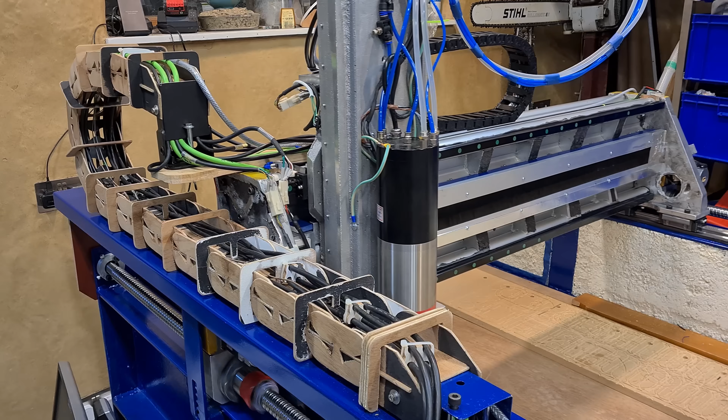This is a big CNC machine. In truth, when we cobbled it together, I didn't know what we were going to be using it for. It defies the first law of CNC building, which is to decide what you'll be cutting and then calculate and design your machine around that.

When you're into upcycling and using reclaimed materials, a versatile tool is a powerful tool. This video is about exploring that power.

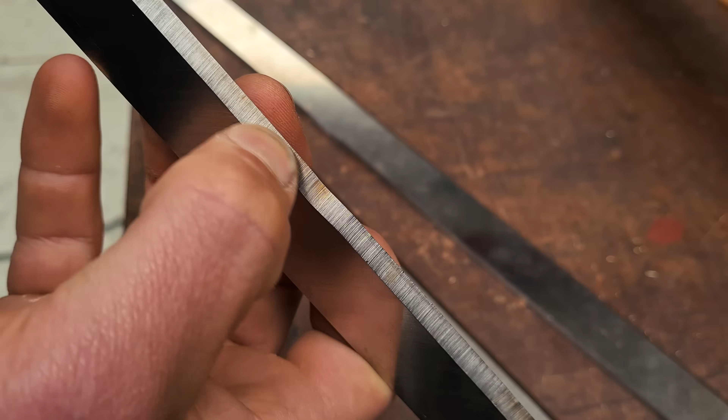A while ago I sent these big planer knives from the thicknesser away to be sharpened, and they came back looking a lot rougher. Admittedly they are sharp, but they're just so much rougher than they were before.

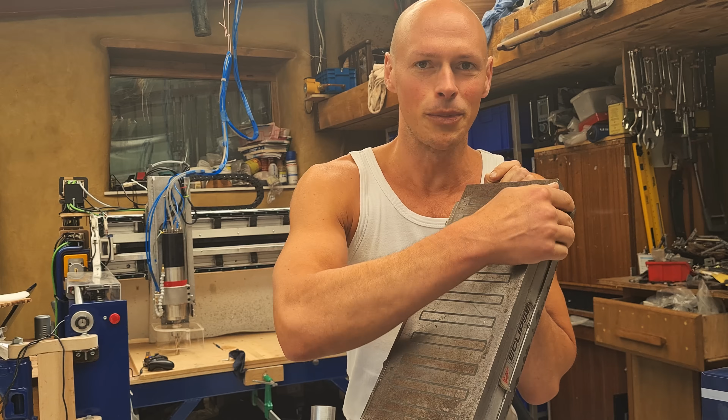So anyway, high-speed steel, this grinding disc, the CNC machine. Oh, and one other thing, I was given this magnetic chuck. It doesn't work at the moment, it doesn't switch on or off, but it'd be quite cool to be able to use that somehow in the whole process. Let's see what we come up with, yeah?

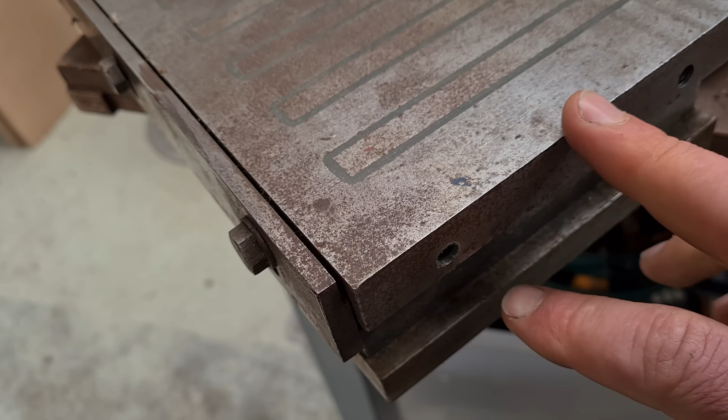Judging by the other side, there was some kind of tapped hole there at some point, but it's just full of congealed something. I don't know what that stuff is.

Now we've got some cleaned up threads on the edge of the mag vise, let's make some brackets to hold the whole thing at a nice angle for planer blade sharpening.

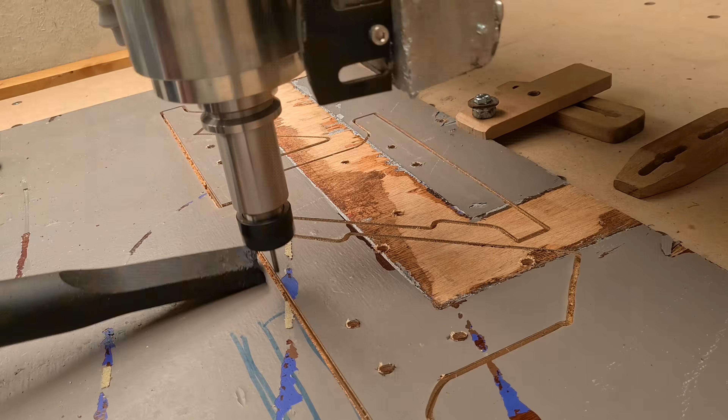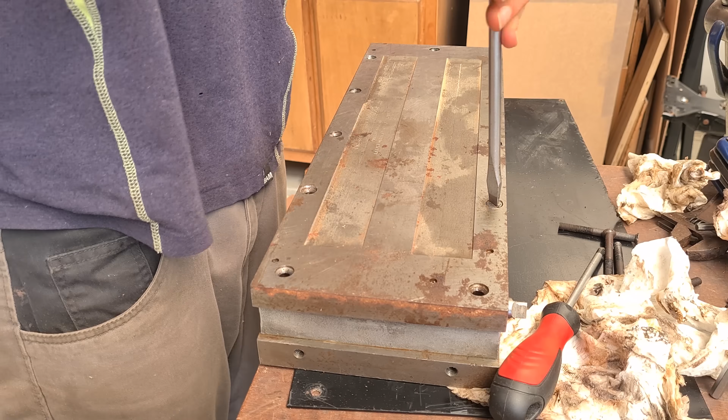Here's what we've got from that scrap. The makers of this thing sure didn't want people going inside, as well as the obligatory 'the world will collapse in if you open it up' warnings. There was also epoxy covering some of the screw heads, and one screw that was just very well seized in.

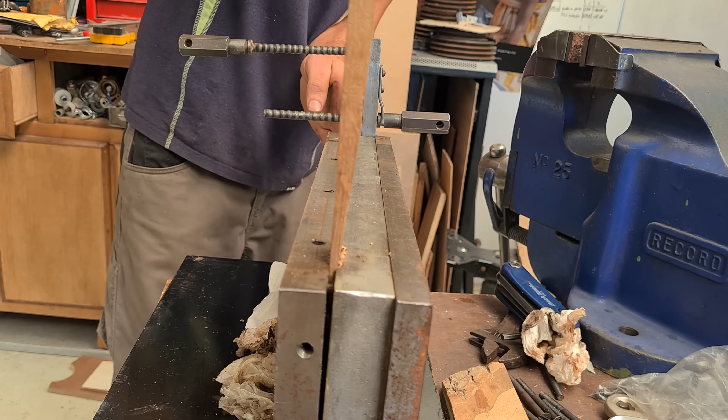Once the screws are out, there's the magnetic force holding it together, but also some very tightly fitting metal dowel pins.

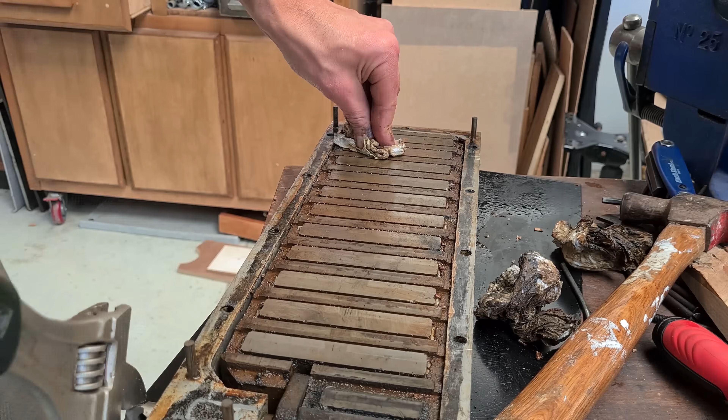For some reason I was expecting more magical pixies inside that make this work. Simply a block of magnets spaced out with not very magnetic material, and that whole block is shifted side to side to line up or not with magnetic material in the top and bottom plate. It's really super simple if you pretend we understand why magnetism works.

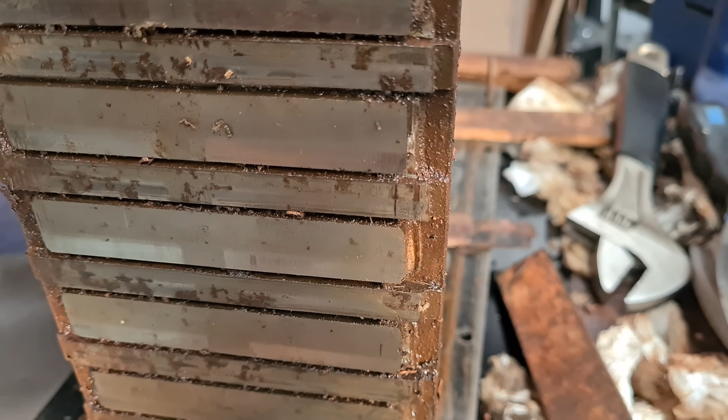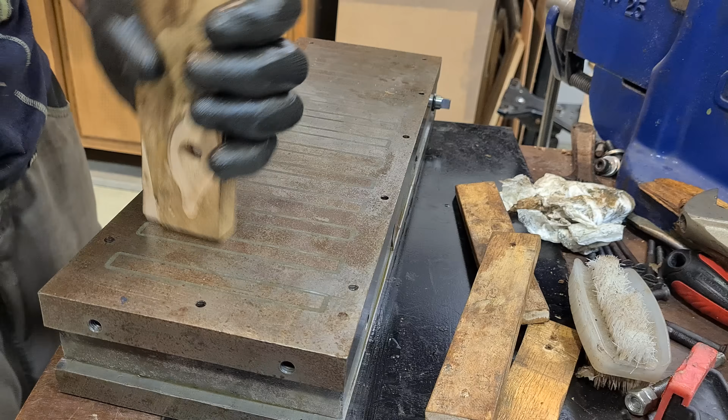The reason this chuck wasn't doing anything was simply that this middle block was seized in place. It's designed to kind of sit in a bath of oil, rather than sitting on a stiff paste of rusty sludge. After cleaning and flattening down all the mating surfaces, verifying it actually works, we can put it back together

with some liquid gasket type material that you get for car sumps. And there's a little oil plug where you can fill the whole thing. Now all we need to do is flatten the surface.

I know what you're thinking. Flowering elbow, why aren't you using a surfacing bit to make that flat spot on the MDF? I'm glad you asked. Let me tell you a story about slate.

This little would-be house sign is a tester, and it gave us confidence that the machine could actually cut slate. Problem is, if the surface is this uneven, turns out engravings look really sucky, leaving you to do all kinds of barbaric chiseling and remedial God knows what.

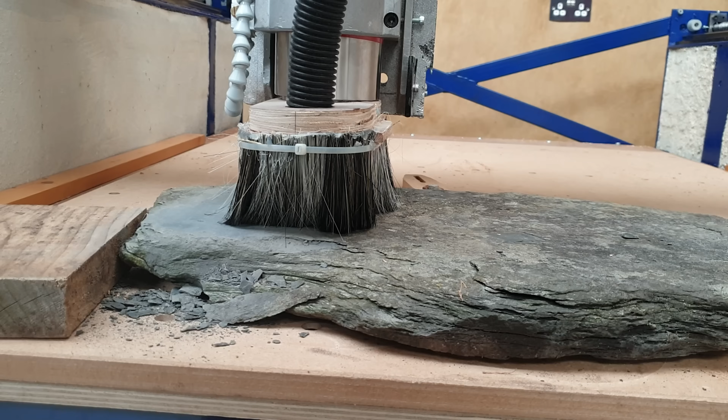For the next test, the obvious thing to try was flattening the slate on the machine the way you would a wooden slab or the spoil board, and in fact that's the same bit I'm using here. It's nothing special, a carbide surfacing bit, and in fact it was a bit blunt before we started.

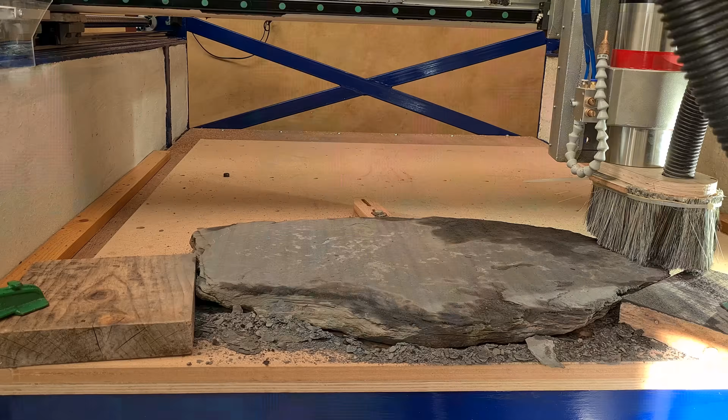Got quite the pushing. Went past the carbide bits and into the backing behind. If you don't mind the unintentional carbide regrind and the slight undulations, that actually worked quite well, considering at least they were proof of concept for something way more intimidating.

Back when we were in fully fledged lockdown here, around about the time when our humble leaders were taking a well-deserved party as it turns out, like too many other people, Sam's dad passed away in hospital, where we were forbidden to visit.

So yeah, if you have any idea of the price of a memorial stone, you'll probably guess what we're up to here.

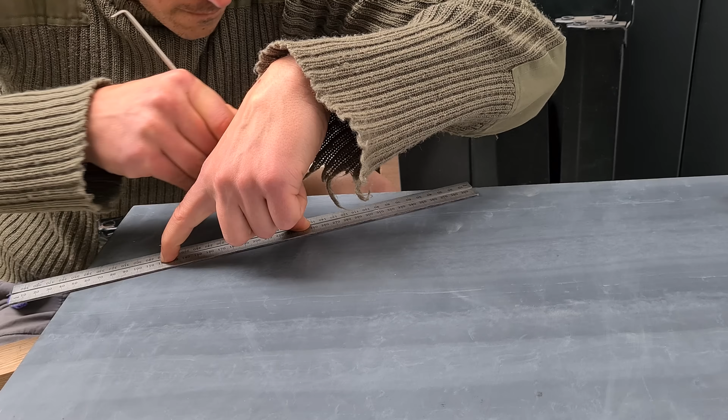Oh, good lord. After explaining what we were up to and selecting this enormously heavy chunk of slate at the slate yard, the guys there kindly offered to surface it with their massive diamond grinder wheel thing.

And honestly, I wasn't going to be doing any more flattening on the CNC machine. Not of stone, anyway. The stone is a shade over 3 inches, meaning I had to get creative to get the whole way through. Luckily, with a lot of patience, it's soft enough that it's possible.

After agonising over fonts for a good while, knowing full well they'd look a bit different engraved on a surface, we tested some out on the offcuts.

We liked them well enough that halfway through we decided to repurpose them as bookends for a slightly morbid, bizarre wedding present for Sam's sister.

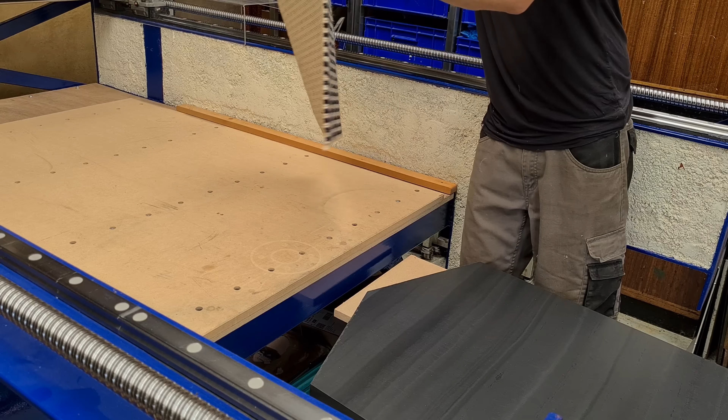It's going to be the heaviest thing that's going to have gone on here. Almost just the right height. I'm a bit nervous about bodging this up while Sam's away.

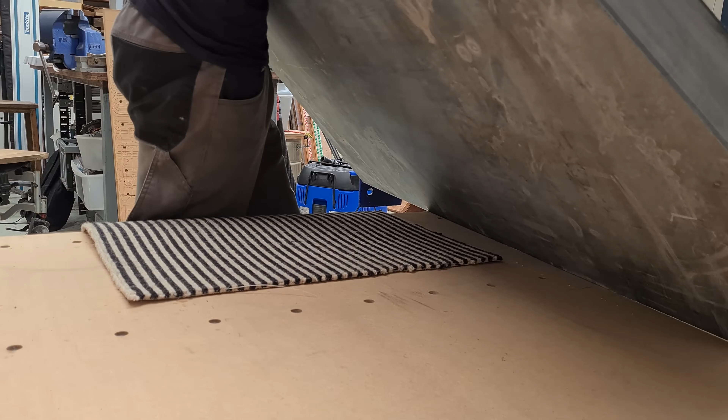Okay. It's a bit shoddy on the back side compared to the front now, so we'll have to give it a good sand down. Put it back gently.

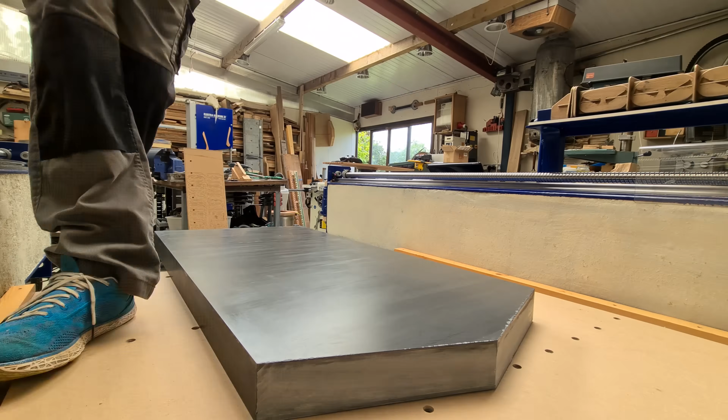It's not laying exactly flat, so we'll have to now make sure it's parallel with the actual spindle. Well, that is way more all over the place than I'd hoped. We'll just have to zero in each either letter or word.

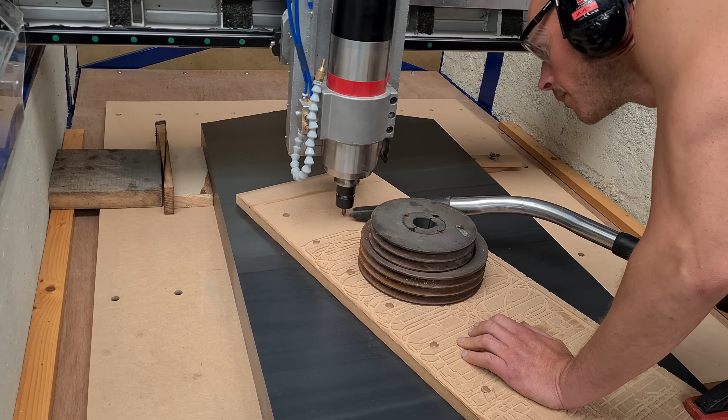So now I'm having a moment of, oh shit, is this really going to work? I might just try it on some wood, just a layer above first, to see what happens.

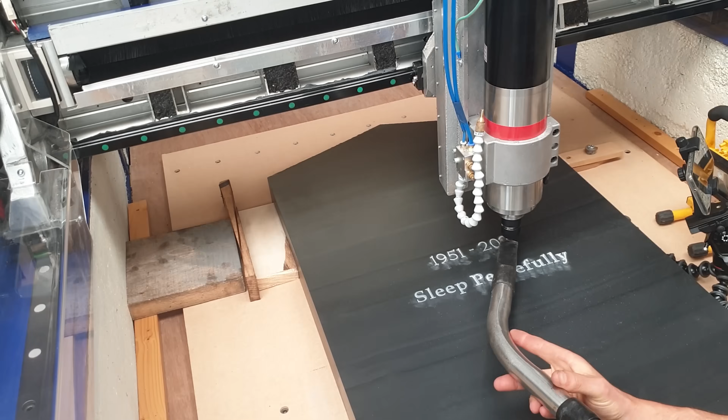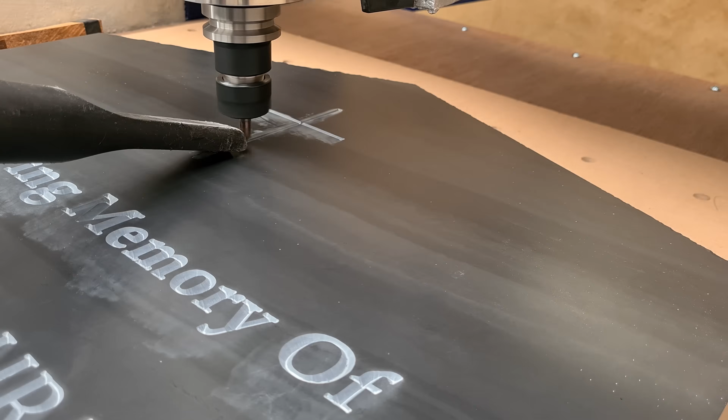Okay, well, as this is supposed to be about the CNC machine, not my headstone related anxiety, here's something to note. The way it clamps in here, it's just some opposing wedges used against the concrete side rails. I've used this method a few times now on quite big things, and it works well. It's interesting because despite the obvious mechanical advantage of having raised up side rails versus tall moving gantry side plates,

is that they get in the way and make it harder to access workpieces and that kind of thing. There's a good deal of truth in that, but the raised rails, as well as keeping the chips further away, can actually be handy for clamping things up.

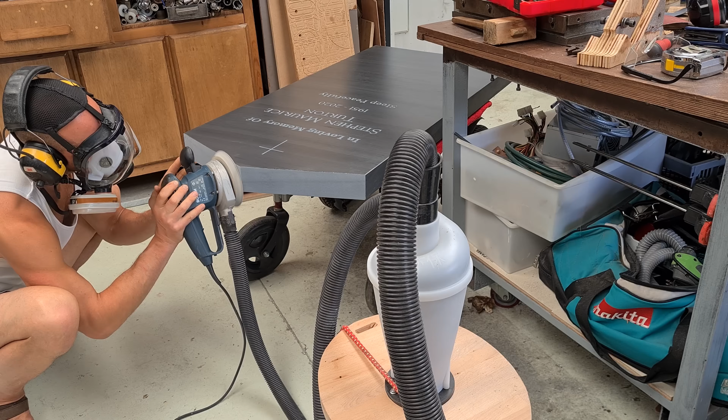Having next to no experience of working slate, I was well pleased with how it sands. It comes up really nice. There was some chip out from where we cut these triangles off, and after looking at it, Sam and me both kind of liked it, so we ended up making that a sort of feature of the top bevel.

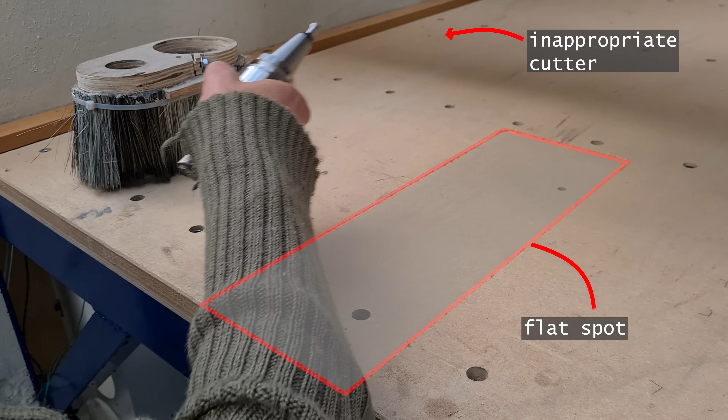So yeah, hopefully that explains why we were using that inappropriate cutter to make this flat spot for the mag chuck. Now, before we attempt to grind it in, because I don't want to annihilate the CNC machine with horrible grinding dust, we need to go on one of those highly rewarding but slightly inconvenient side quests to make some kind of dust shield that's big enough to fit the grinding wheel in.

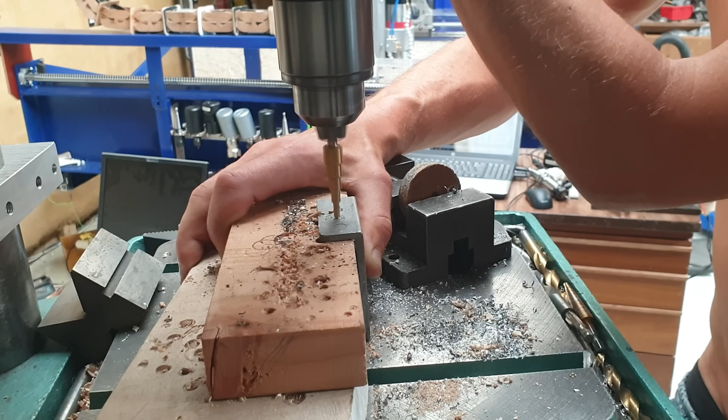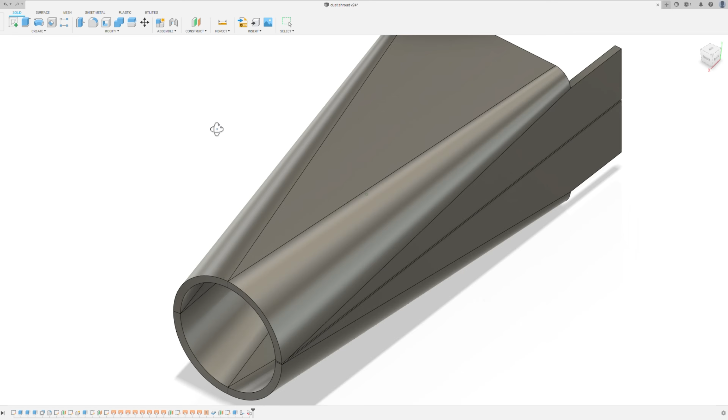We might be on a complete bungling fool's errand, but we're going to take this rectangular section and try and taper it down to a circular section. I've wasted an obscene amount of time already on Fusion 360 learning how to model that.

Without getting into the weeds too much, this is the part with the piece we've already made. If we look at just the transition, it's designed to be a sheet metal part as far as Fusion 360 is concerned. It has a seam, so it makes sense as a sheet metal part. And if we unfold it and look at the flat pattern, there's a problem here that you can see when you go to the side, in that I just couldn't get it to fold flat.

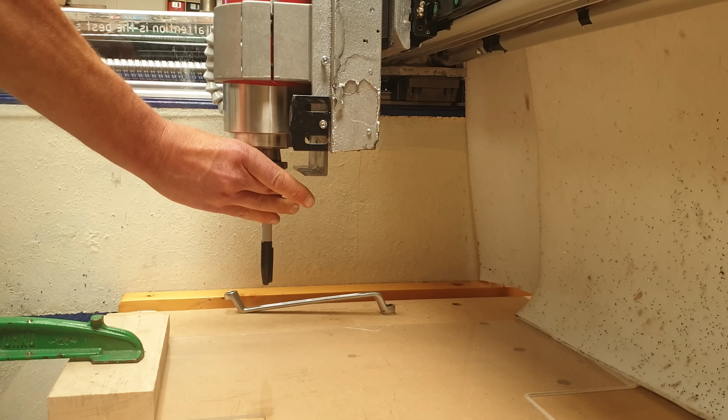I don't know why, and I never got to the bottom of it. Sometimes you just got to live with these mysteries. I think it'd be really cool to see through it, so we're going to try and cut it out of the same material. Considering how difficult it was to bend this to shape, we'll see how it goes.

These will be the folding guides. I think I'll need to have even a remote hope of making this work.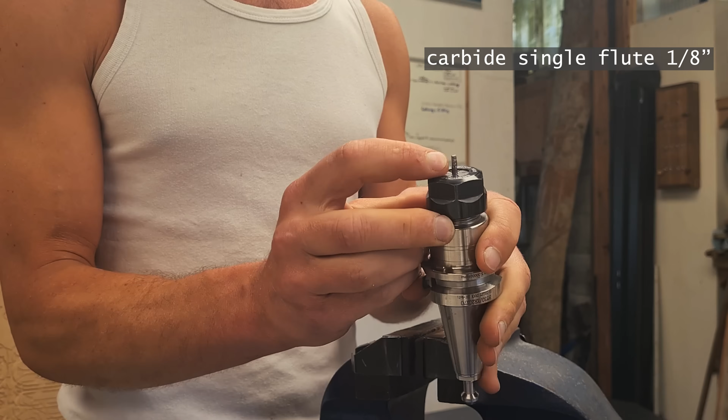These single flute bits are turning out to be quite fragile. They were very cheap for a pack of 10, but this one broke and I've no idea how. It was not even in the machine.

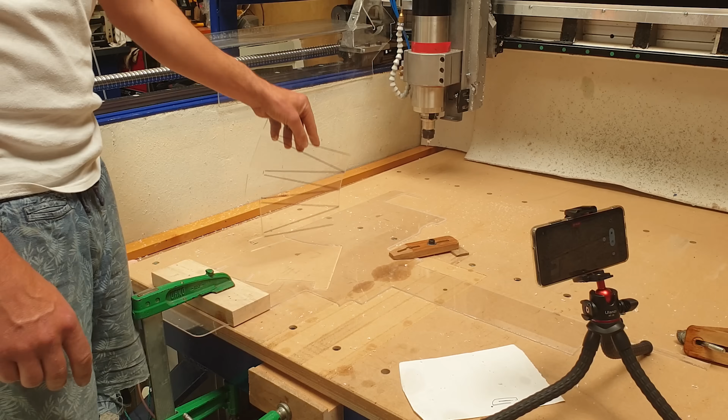Okay, there is our transition piece. Oh. Schoolboy error.

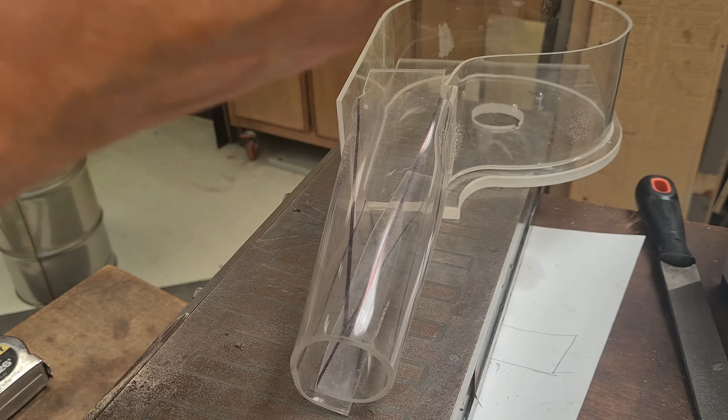Well, it's not exactly how I envisaged it, but I think this is as good as it's going to get, so I'll put some super glue on, see if we can't hold it in this position here. We're using thick viscosity.

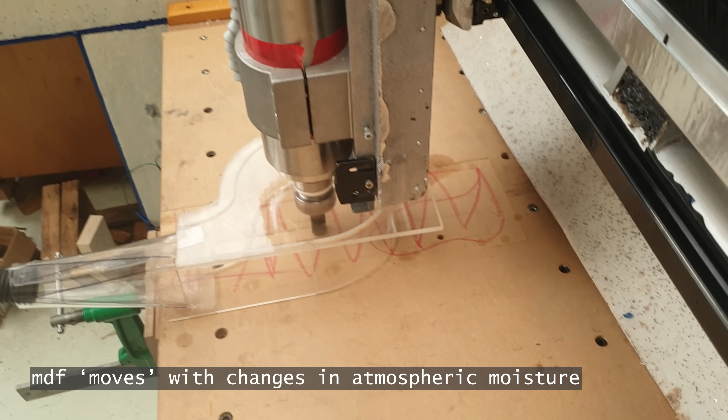Let's try out the dust shoe. By the time it was ready and some other hijacking jobs were done, it was time to re-level this patch of MDF spoil board before we could grind in the mag chuck anyway. Still, it gives me a chance to see the swirly suck-uppy magic in action, and it looks quite promising in terms of the dust extraction.

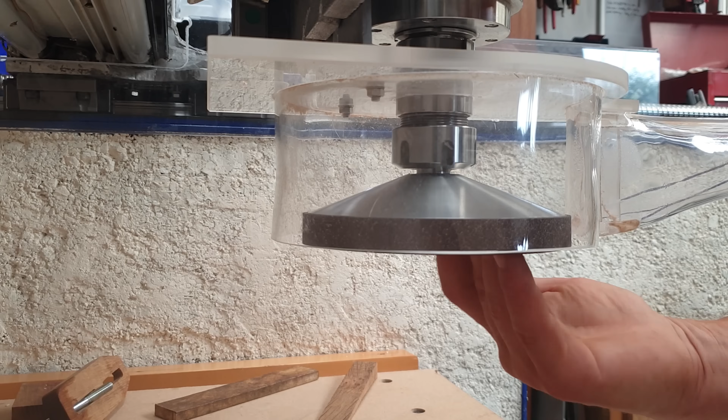So just adjusting the height, put that in, looks okay.

Now the mag chuck's in place, but unfortunately the dowel pins are sticking up proud of the surface now, so before we can put anything on it, although it's still very flat, we just need to clean up the surface, or grind it in as they say.

This really should be quite a test for the spindle. Not only are we going at only 3,500 RPM, which is crazy slow for a 24,000 RPM spindle, it's got to maintain that for roughly about 45 minutes according to the machining time. Let's see how warm it gets or whether it can manage at all.

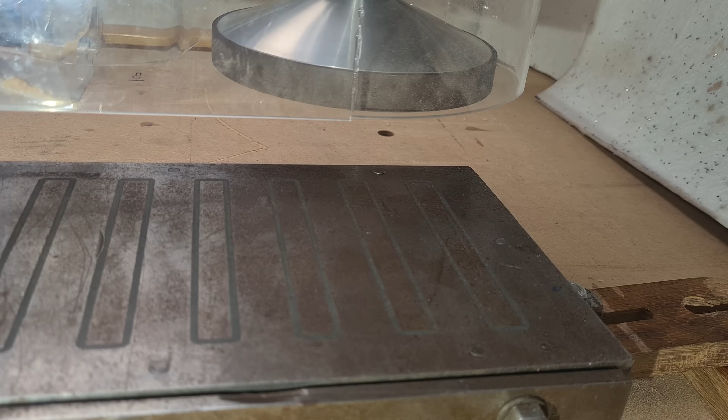Okay, you can see that there, that's what we're aiming for.

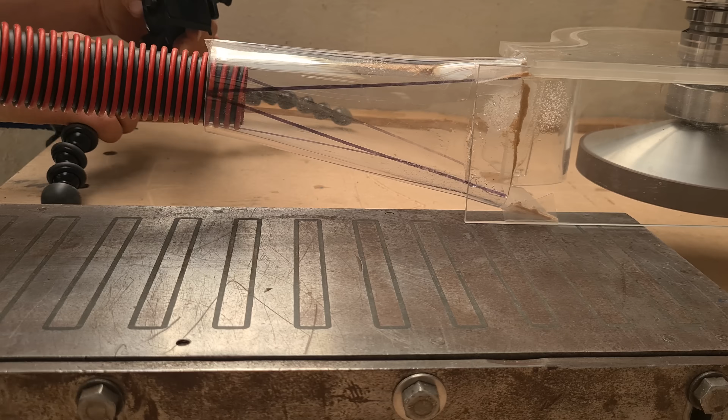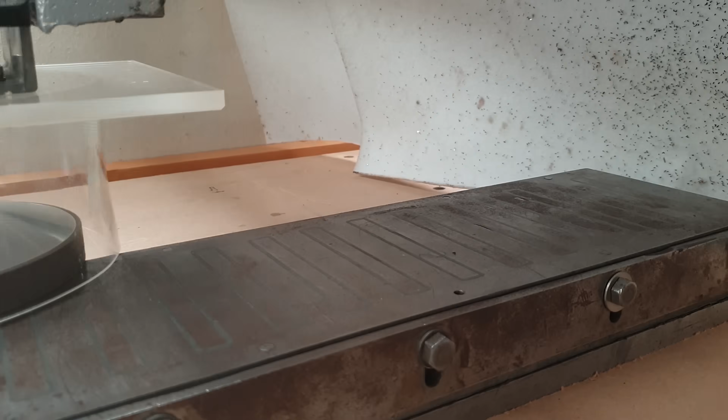Okay, I think we're off to the races. What becomes immediately evident is the slight tram of the spindle, which sends the sparks in a particular direction. The dust shoe is connected to the shop vac via a cyclone, and it is pretty cool to be able to see into the dust shoe to see that sucking up in action.

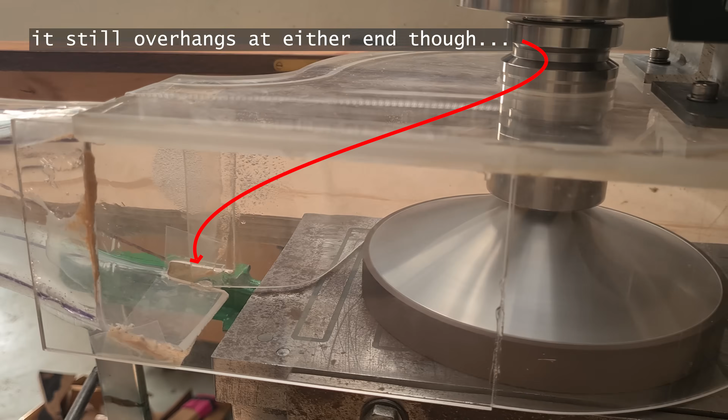Unfortunately, because the dust shoe is hanging off the side of the mag vise, the vacuum forces on the grinding dust are just way reduced. In an attempt to capture more of that, you can see I've rigged up a bit of MDF here just at the same level. Now for the little protruding dowel pins, I thought this was actually working not too bad. Then we started getting to the main body of the material.

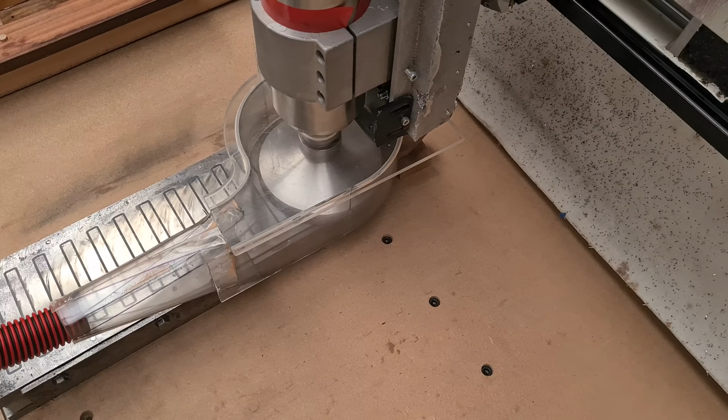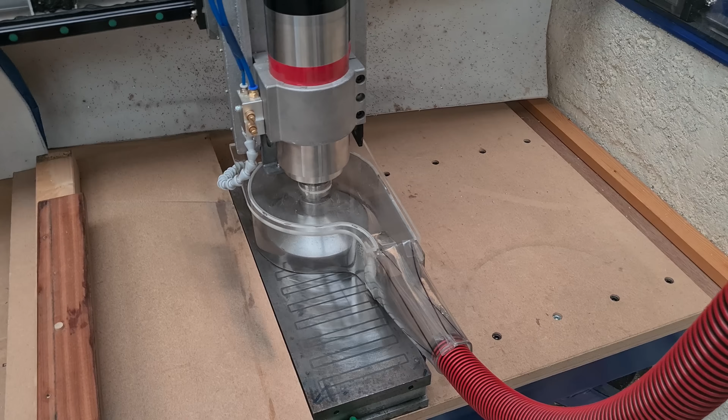Things went downhill from there. I tried various different things, using little bits of coolant on the thing, different feeds and speeds, including slightly naughty ones that were overrevving the grinding wheel. The more things I tried and the more I continued, the more hesitant I got, the more sparks I saw flying out uncaptured, the more grew that sinking feeling that I was making a terrible mistake. The poor spindle grinding to a halt and moaning in complaint each time it hit a high spot. It was not a reassuring experience.

So how did all that go? It went absolutely awfully, that's how it went. Surface grinding on that edge of a grinding disc just doesn't make sense. Too much of it is contacting the workpiece, and I really struggled with it heating up. More on that later. Because of the very slight tram on the spindle, the sparks were going in a different direction, so sparks and abrasive dust went flying all over the place, just like a Catherine's wheel.

Too much of this is in contact with the chuck at once, versus if it was spinning that way, it heated up, lifted higher, and so then tried to grind more heavy. The spindle is completely not designed for this. It stayed nice and cool, and I was piddling around with this for a good few hours. So I'm actually quite impressed with the spindle, and also my own foolhardiness at trying to get it to do something so silly.

This thing should be used with flood coolant. It can go dry, but I was warned it would be much better with flood coolant. That would have improved this whole thing no end, and it might have even worked. Flood coolant on an MDF spoil board doesn't go very well. I think we might have got through all the reasons why this was a complete fool's errand.

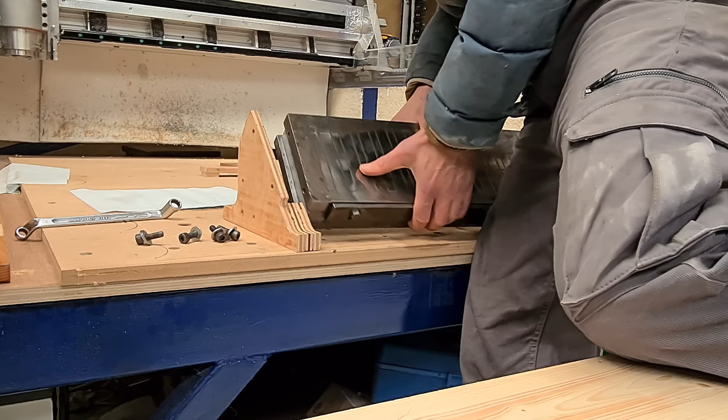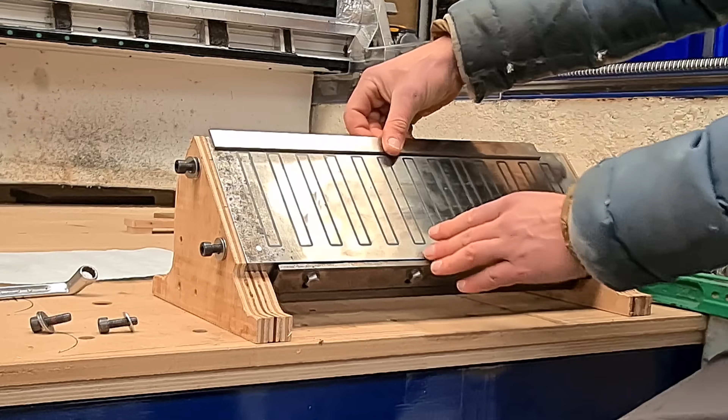Thought that was going to be quite nice. Turns out though, the magnetic field lines don't seem to extend towards the edge, so this is hardly held on at all at the top. And I can't have it down here for obvious reasons, the grinding wheel will snag. I can't have it that way around unless it extends over, so yep, okay, so we need to abandon this method. Let's carry on with the foolhardy optimism.

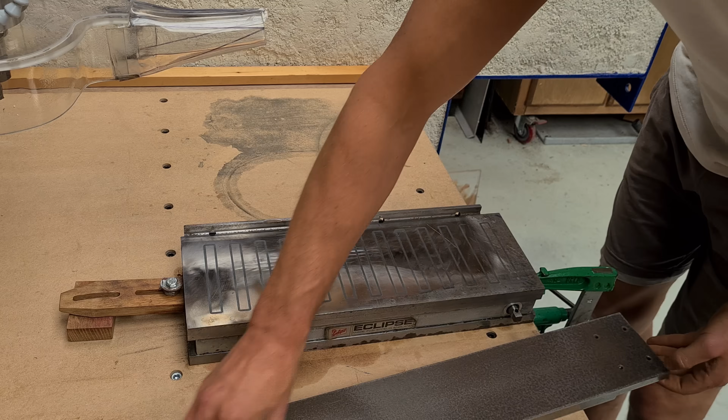I've got this bit of steel here that I'm going to try cutting a V-groove in so that we can sharpen the planer blades. You'll see how that may not work. I don't know what type of steel it is other than rusty, and mainly I just want to try out the CNC machine cutting some steel again. Let's see how we go. I must admit I'm quite excited. This is going to be the second time cutting steel. Hopefully it's clamped down firmly enough.

I've been through chip load calculations and blah blah. That might all just go out the window when we start cutting, we'll find out. We're going to use this again just to try and keep the chips from spraying in an upwards trajectory, which sends them a long way. You can see the helical entry there is quite dramatic. This is an 8mm carbide bit.

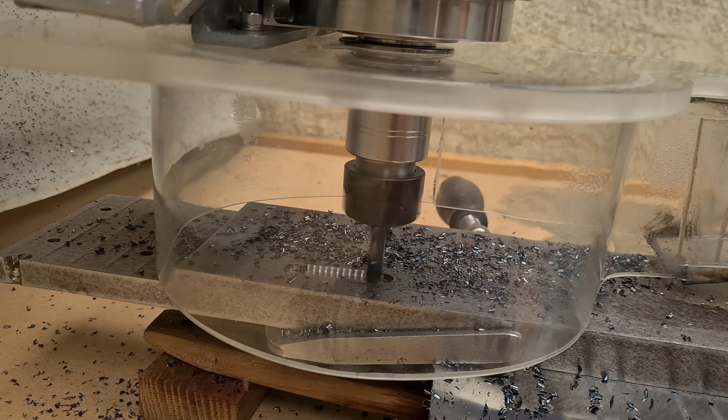After that, it's settling into a trochoidal or adaptive toolpath, which I think is probably the way to go in steel to remove a good bit of material, at least on machines where you're slightly unsure of their steel cutting prowess. It's a sort of roughing out strategy, and it can then be finished off with a straight path like this.

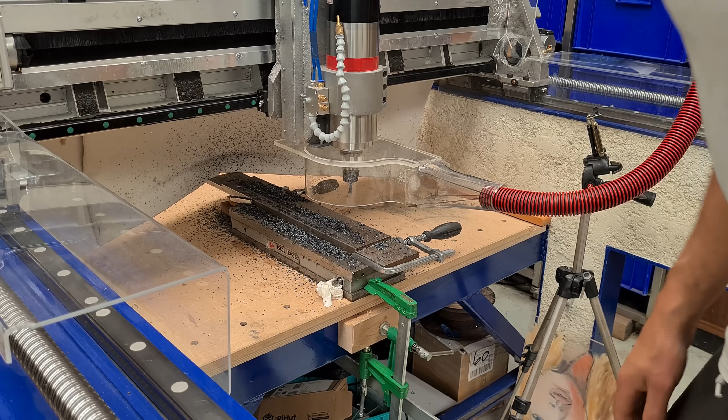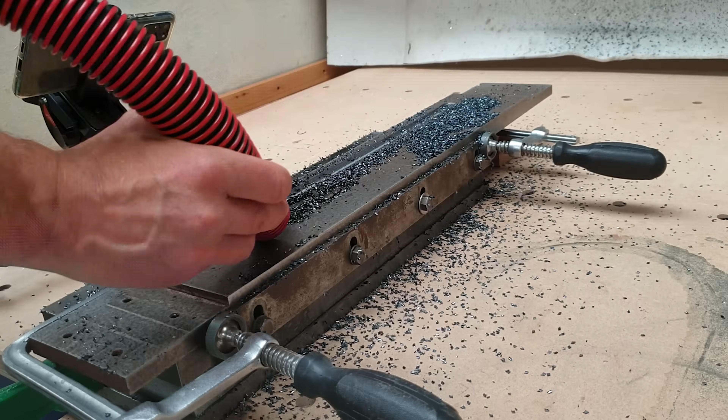Okay, how did that go? Let's have a look, let's have a look. I think the bluish purplish hue means they got very hot, but then I think the fireworks were quite a good indication of that anyway. Finish is perfectly reasonable. A bit better than whatever it was that did that machining anyway. So I've just changed bits. We're going to need to do some modification to get this to go up a little bit further, or it's going to snag.

This is going at 12,000 RPM and only 1mm depth of cut this time, so hopefully it shouldn't be overstressed. Only 400mm a minute, so this is going to take a while. Of course, if I was doing this again, now I would be using the MQL system you saw me set up in part 1 of this video. The cheap Amazon one's there, it's just so awkward I'm not using it.

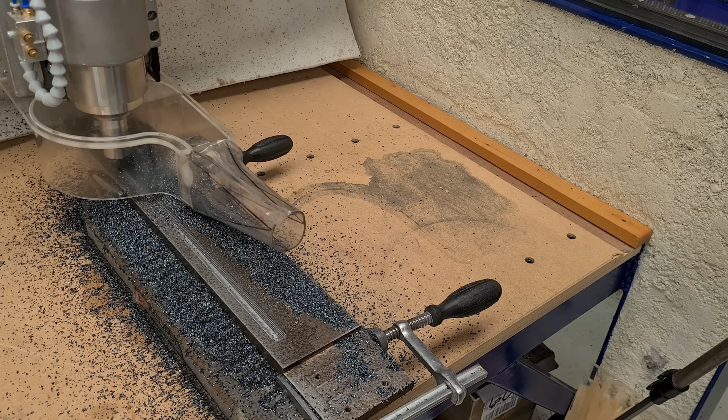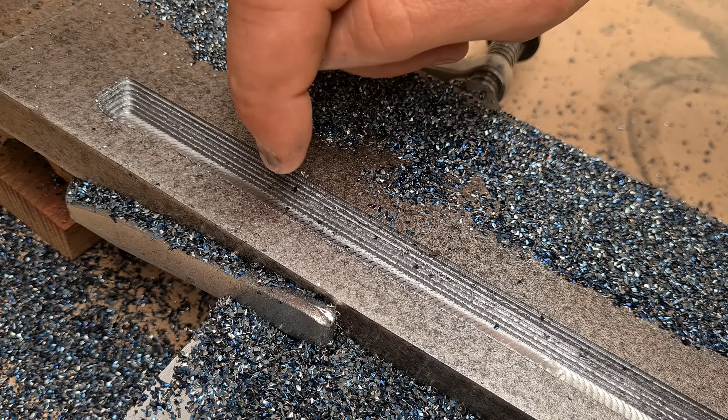Okay, here we go. We've got those chips. Bottom's perfectly reasonable, feels very smooth, and that edge is ready for the chamfer. Yeah, I'd say that needs to be a bit more sleek.

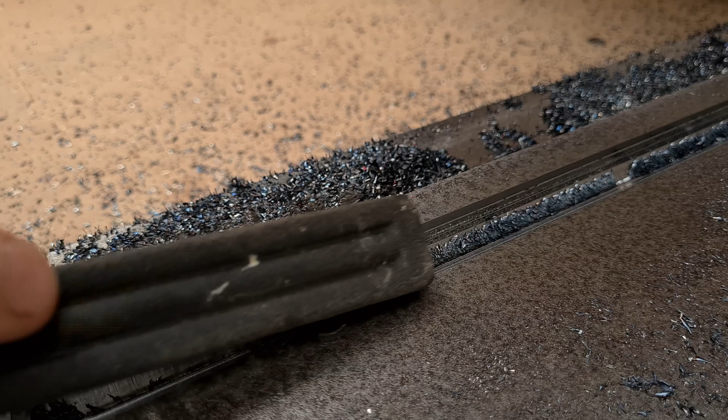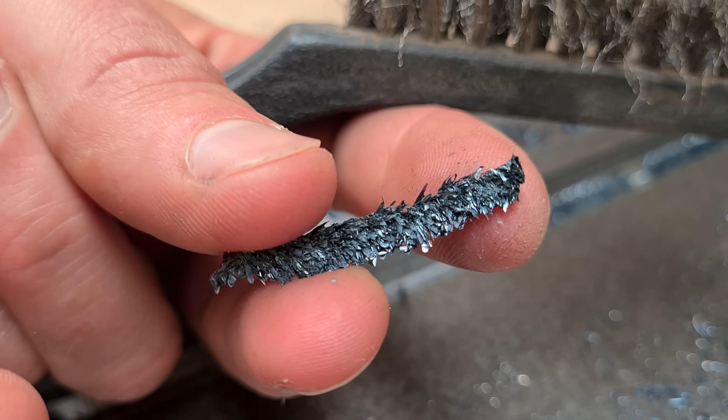They seem quite either welded in there or the mag chuck's holding them in. It wasn't a great way of cutting it. It was recutting through these. I think the mag chuck was holding them down, so there's that stupid strategy. There's the chips. They do seem kind of welded together. Okay.

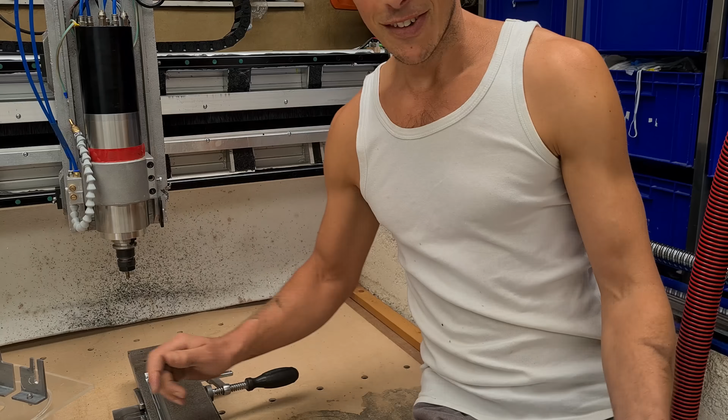What a blundering kerfuffle. The very root of the V-groove just got way too hot and it kind of looks like a weld seam or something. More importantly, the whole chuck has shifted, almost a millimetre. It might explain why the very end here is just incredibly rough. The rest of it's really quite a nice finish. Surprisingly nice considering all those sparks.

So now it's a question of realigning it perfectly. We're going to have to make the whole feature a little bit bigger, and I'll also make a relief cut with like a 4mm end mill or something just in the root of that V-groove, and hopefully that'll solve the problem.

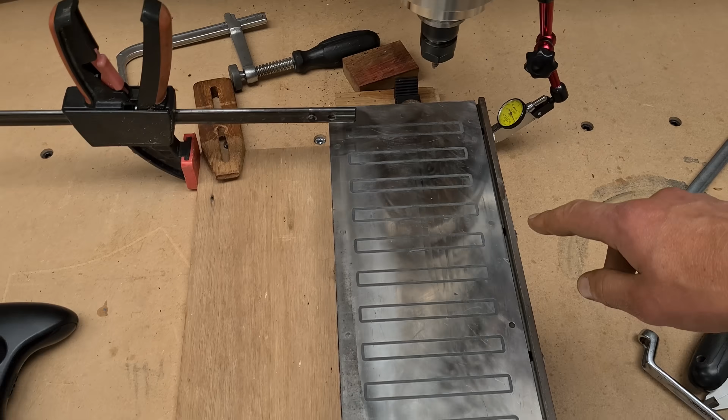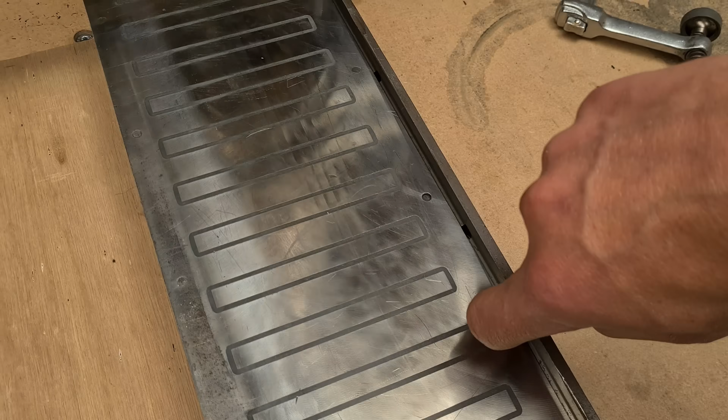What I've discovered is that the bottom edge here, which I just assumed would be parallel with this fence, and they're completely not, out by about a millimetre in fact. So when I placed my bit of steel on here, it was actually a millimetre off squiff. So I guess what I'm going to try and do is just machine this piece and see if I can't get that straight. The problem is this is clearly going to be some kind of hardened bit of monster metal.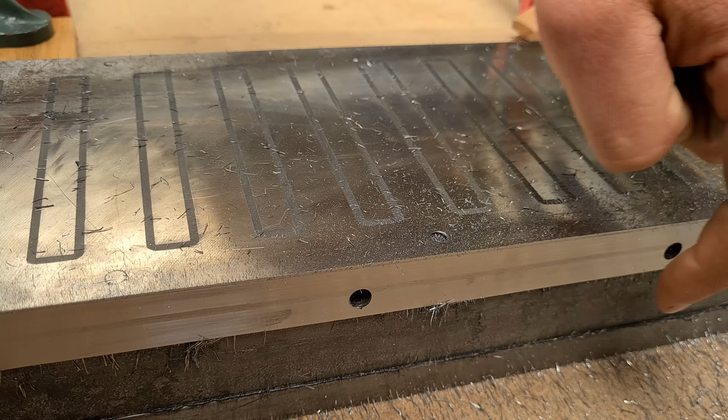Instead of squaring up the fence, I decided I might as well square up the side of the chuck that it actually mounts to. Then that'll be parallel to the base just below it. Good a finish as I've ever got on steel. You can see there's something coming out of the screw holes, a bit of grease or something in there that's put a streak line across the whole thing. But it is very smooth. I can't really get much from my fingernail. We should be able to see how accurate this piece is.

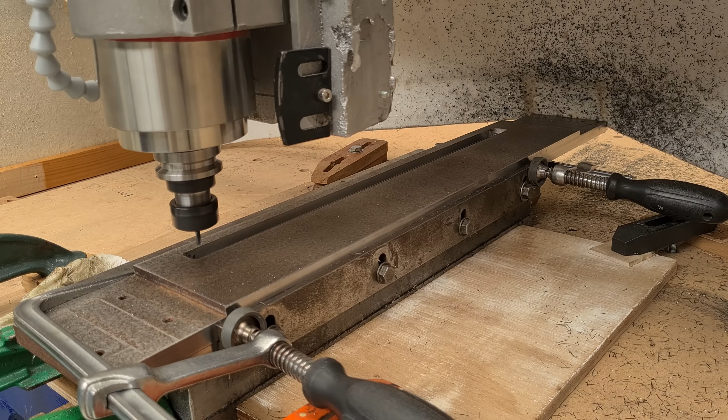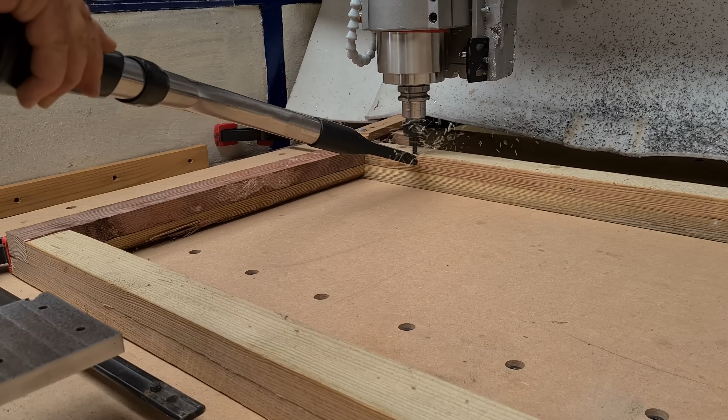That was rather good, but then we found the edge of the steel was a little bit wonky, so it wasn't sitting against the fence nicely. So let's clean that up. Right, now we have that clean, tight and bright in places. Let's clamp it down and begin our shameful remedial work. It doesn't help with rigidity in hardcore milling, but one of the cool things about having this big 8x4 bed is you can leave things set up and get on with actually useful jobs on other parts of it.

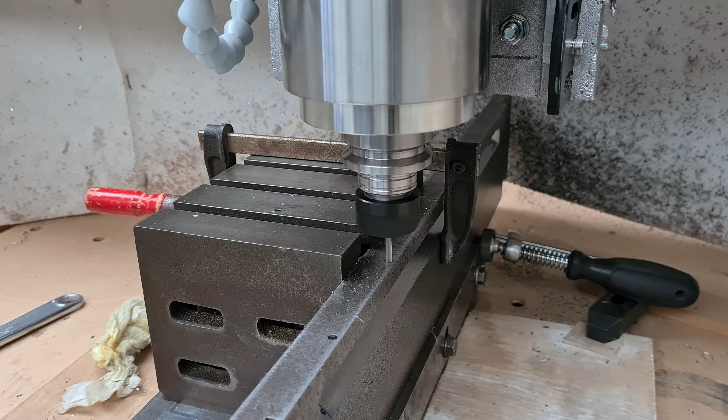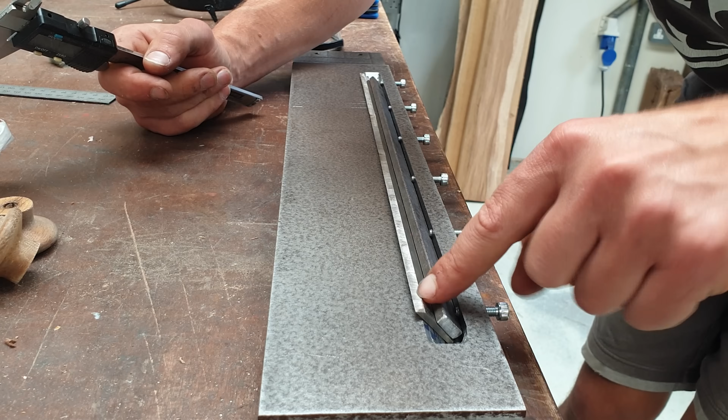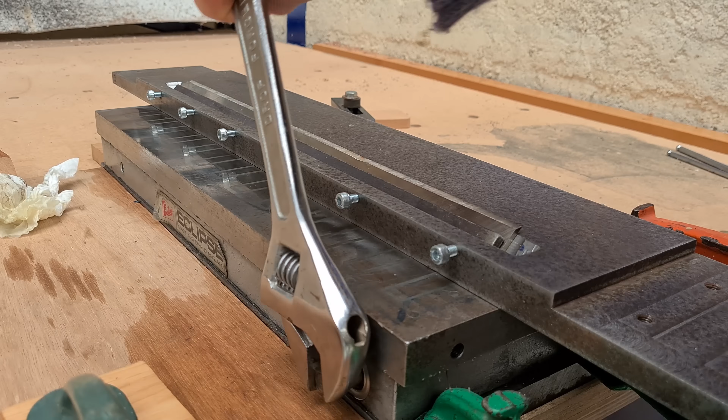And then almost unbelievably, we're ready to try the original goal of sharpening some planer blades. It would have been nicer to have bolts that press down exactly perpendicular to the blade, but that was going to be hard to arrange. 4.2 that side, and this side we've got 3.6. In the middle we've got 3.5. Feels good. Because of how this was ground in the past, that side's about a millimetre higher than that side, which is a huge amount to grind off. I'm tempted to try.

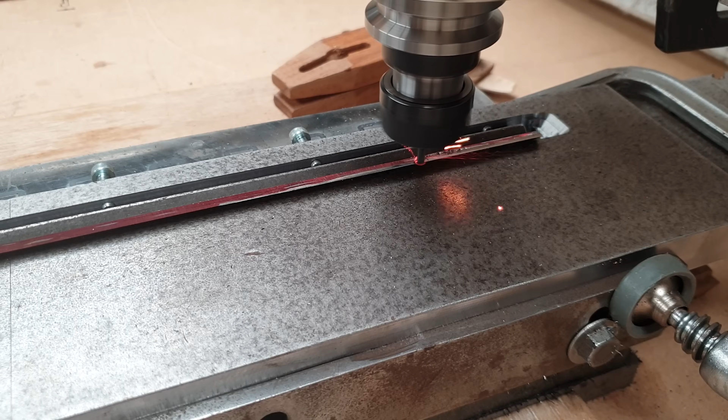Well, for a first go milling high-speed steel, it was all very exciting and kind of went okay, I think. And it's left a little burr there. I wonder, in fact, if just getting that burr off would even constitute a sharper blade than it was just from this milling. There's one bit over here where I didn't catch that divot.

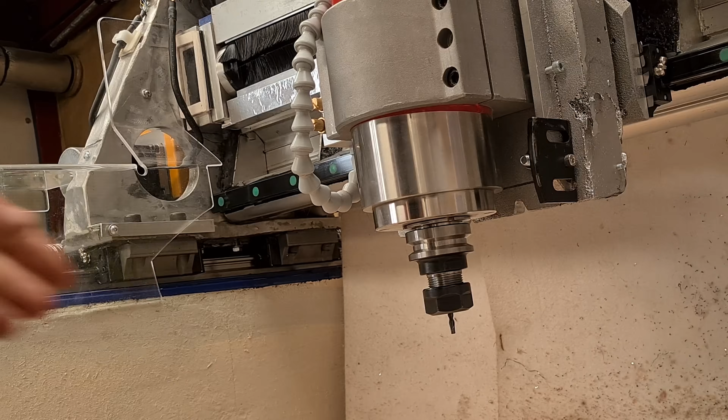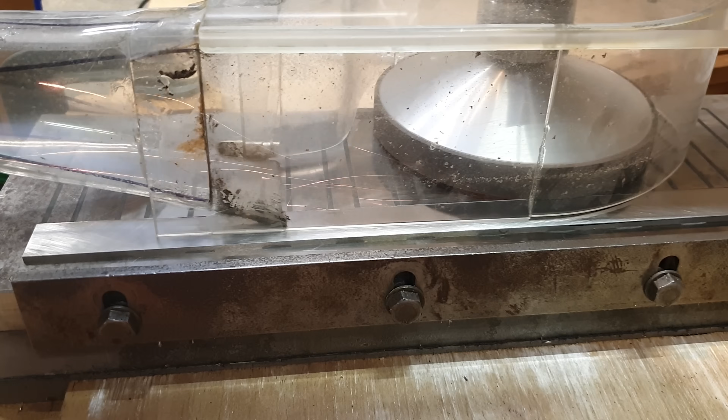Yes, I realise I should have got a smaller diameter grinding wheel by now, but mercifully this is actually working quite well. Here comes the closest we came to stalling. That has left us with a nice surface where we ground, hopefully you can see that, but the mother of all burrs on the back side that I thought I might be able to leather strop off, but not happening at all. With it simply flat on the mag chuck, removing a small burr like this actually works quite well. It's as good as it's going to get.

Right then, I think what we've learned is if you want your planer blades sharper and straighter than they need to be, then build yourself a giant CNC machine, an overcomplicated mag chuck jig holding contraption. Use that with a poorly matched grinding wheel and a dust extraction that doesn't work, and there you go.